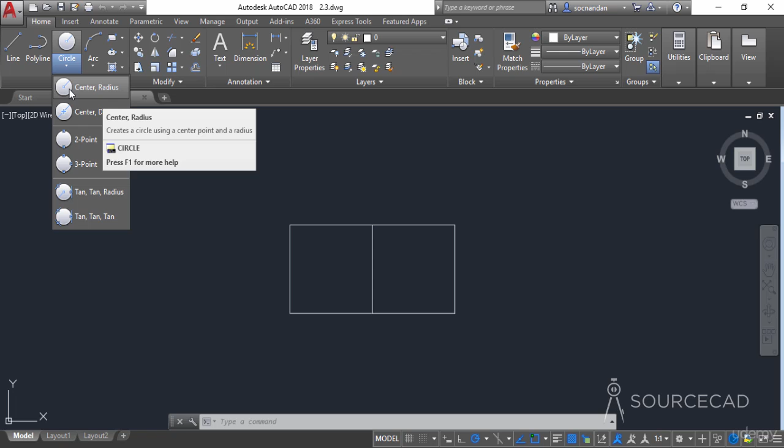So the most basic method of making a circle is the center radius. Now in order to select the command, you can click on this center radius option, or you can also use its command equivalent CIRCLE or C. Now after starting the command, click at the point from where you want to start the circle, and in this case we want to start the circle from this midpoint of this rectangular geometry. So I'll click at this point and this will be the center of our circle.

Now look at the command line and it prompts you to specify the radius of this circle. So let's enter the radius of this circle as 1 unit and press enter. So now here we have it, the circle with radius of 1 unit or a diameter of 2 units at the center of this line.

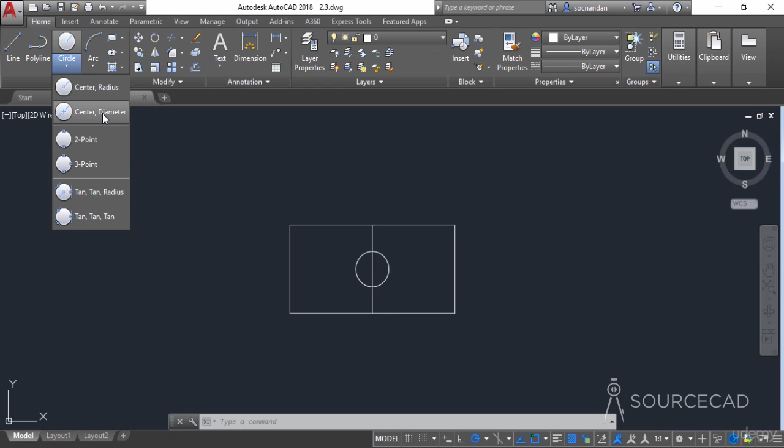Now let's look at the other method of making the circle. So go to this circle flyout and select the center diameter, and in this case we need to specify the center first, and when you look at the command line you'll notice that this option has been overridden and we have this option now which says that we need to specify the diameter of the circle. So let's type 3 as the diameter and press enter, and now here we have it, the circle with a diameter of 3 units or a radius of 1.5 units.

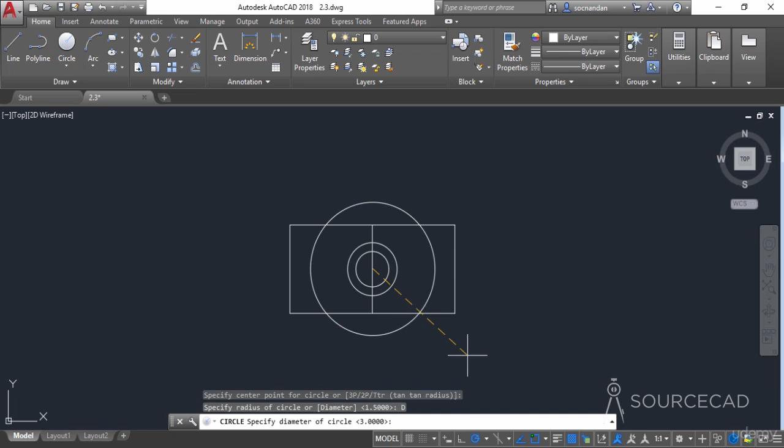You can also start the diameter option from this center radius command. So click on this center radius. Now click at this point or any other point to start the circle, and now you can click on this diameter option on the command line, and now simply enter the diameter value. Let's say that we want to enter 4 as the diameter value and press enter, and here we have it, the circle with a diameter of 4 units or a radius of 2 units.

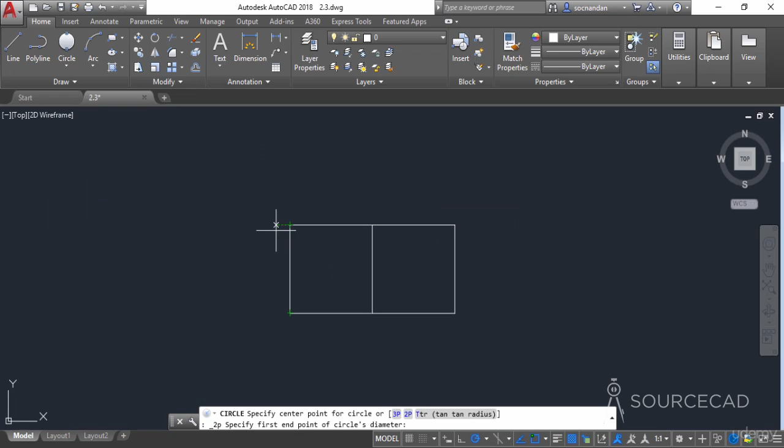So let's now erase all of these circles and now look at the remaining options here. So the next option is a 2-point circle. So what if we want to make a circle that connects 2 points, for example the end points of this line? So here we can click on this point and then click on this point, and here we have the circle, and this line will act as a diameter for the circle.

Now let's click on this flyout again and select the 3 point. Now in this case we need to specify 3 different points. So I'll select here the first point. Now select the second point here, and now I'll select this point, and this is the midpoint of this line. So I'll click on this point, and here we have it, the circle on 3 different points. So this circle will essentially pass through these 3 points, and the radius of this circle will be decided based on the geometry here or based on the points on which we click.

Now let's look at the remaining options here. So now we have one more option here, which is tangent radius. So I'll select this tangent radius, and now let's select any of the geometry for the first tangent point. So click on this circle. Now click on this line. So now the circle will be tangent on this circle and on this line, and now we need to enter the radius. So you need to enter a radius which will be appropriate for this geometry.

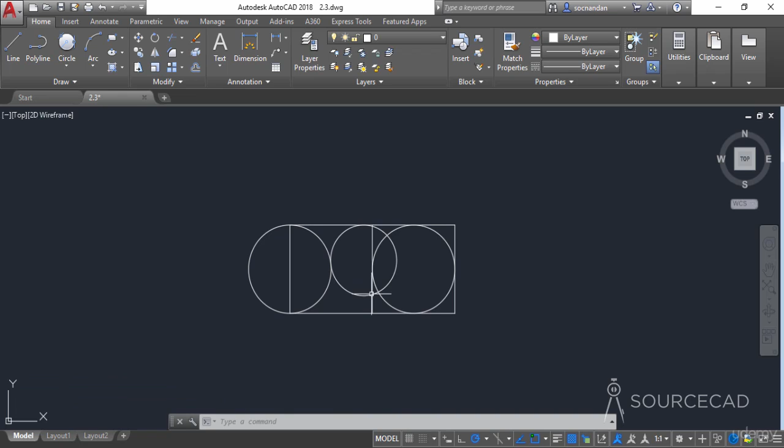So I'll enter 2 here and press enter, and now when you look here you'll notice that this circle is tangent on this circle, and this circle is also tangent on this line, and the radius of this circle is 2 units.

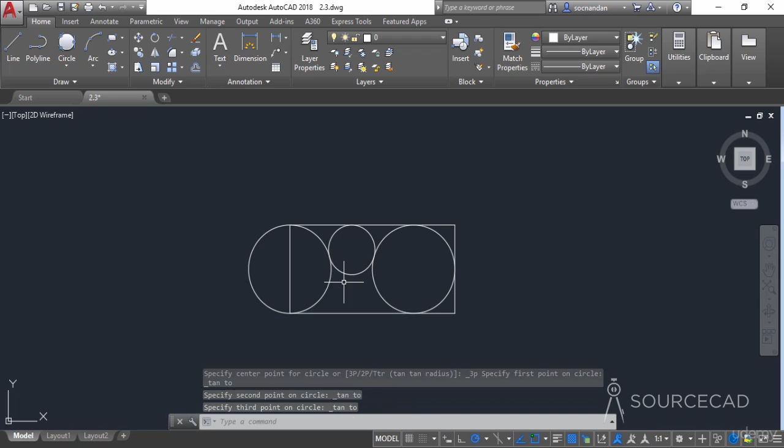Now what if we want to make a geometry in such a way that it's tangent on 3 different geometries? For that I'll first erase these 2 geometries, and now we'll make a single circle which is tangent on this line and on these 2 circles. So for that I'll select the last option, which is tan tan tan. Now click on the first circle, the line and the circle, and here we have it, this circle is tangent on both of these circles and also on this line. So these are the different ways of making a circle in AutoCAD.